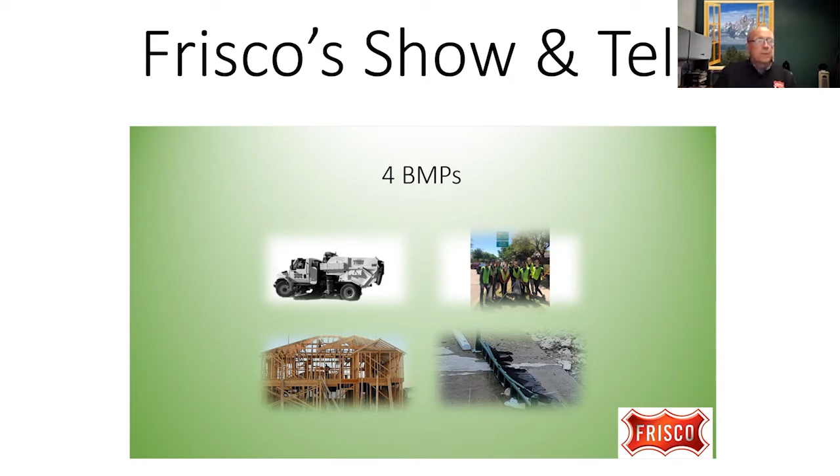I want to thank COG for putting this on and all the events they've provided in the past. I want to talk about 4 BMPs that we have in Frisco. We have a lot of BMPs, obviously, but I just picked 4 of them that I think we're doing something a little bit different, maybe a little nuanced to what others are doing. The idea is that you might benefit from the way we're doing it and make it your best management practice as well. I serve on a team, we do a lot of things I think really well, and I don't mention everyone's - I don't mean to leave anyone out by not mentioning the BMPs they're involved in, but I picked these 4 for the reason I stated, that others might benefit from it as well.

The 4 are: street cleaning, adopt a street, the way we handle single family housing, and our trash rack. Now, first let's talk about our street sweeping.

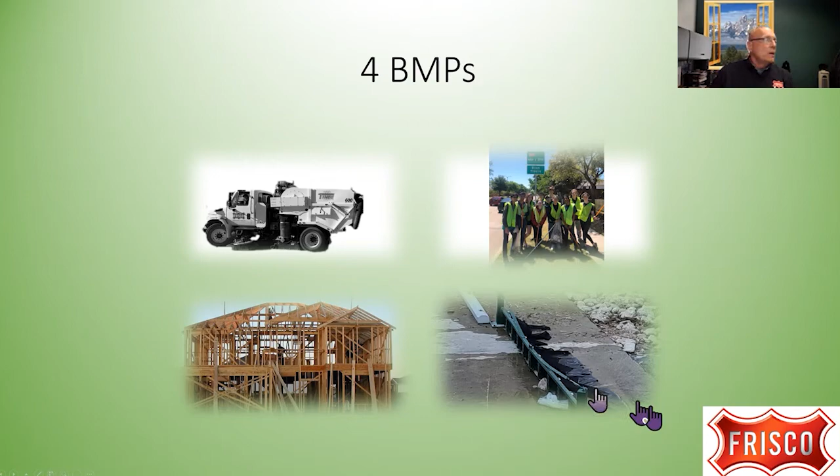Let me shed a little bit of light on our street sweeping program. First of all, if you're not familiar with it, this particular type of street sweeper is a regenerative air sweeper. Does my cursor show up on the screen? Okay, it does show. The regenerative type sweeping, which picks up fines and other things, is a very effective way of sweeping. I'm going to mention that and how we use it in a moment.

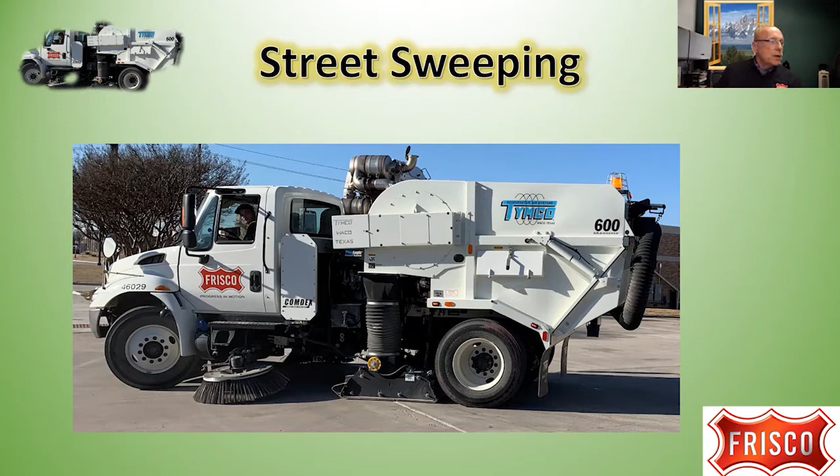We have 3 types of sweeping in Frisco. We have contract sweeping, which is done with the regenerative air, and then we have an in-house sweeping program that has 1 regenerative sweeper and then a broom, which I'll show you a picture of in a minute. On our contract sweeping, I found it's effective if you give them routes and they do them over and over again. We have 2 times a month for our thoroughfares, once a month for collectors. They're very effective at doing that.

Also, sand removal after a winter like what we just had - they're good at that, but they don't do so well jumping around, and that's what we got our in-house sweeping program for. We do that for our city yards. From time to time our yards get in a mess, like every week, because of the activities we do, the digging in mud and so forth. So the yards need to be swept, and we also do residential streets as needed with in-house sweeping and sand removal - we help on that as well.

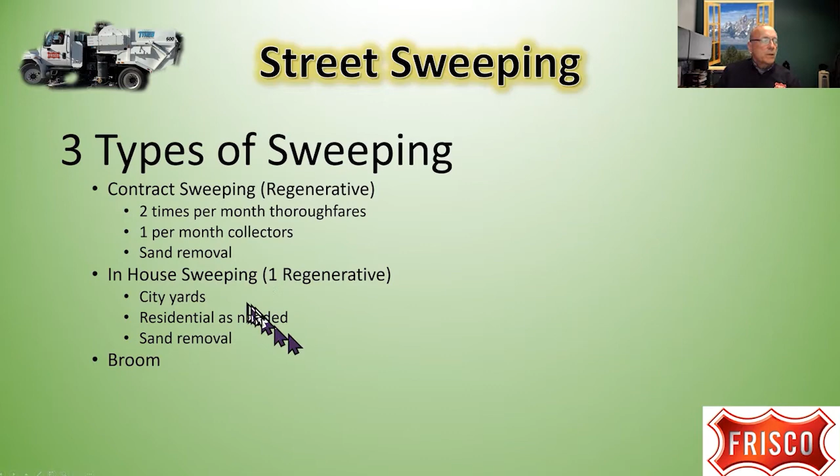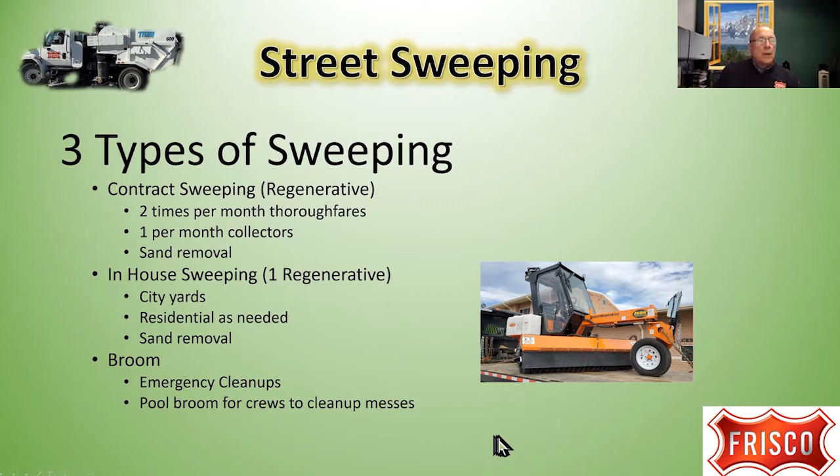So we found that jumping around is good with the in-house sweeper, but we also needed a broom - this is the broom I'm talking about. This is more for emergency cleanups, and stormwater actually purchased this broom as a pool broom for the street department, water department, stormwater, anyone who makes a mess - they can go out and clean up their mess.

And this is relatively new. One reason we got it is the regenerative sweeping takes a couple of days of training to learn how to do. This one you can learn how to operate in 30 minutes. It has an air-conditioned cab, and I resisted getting an air-conditioned cab, but then we realized, what's the best chance of getting the street swept on a hot day? An air-conditioned cab, and also it protects the operator from all the dust generated.

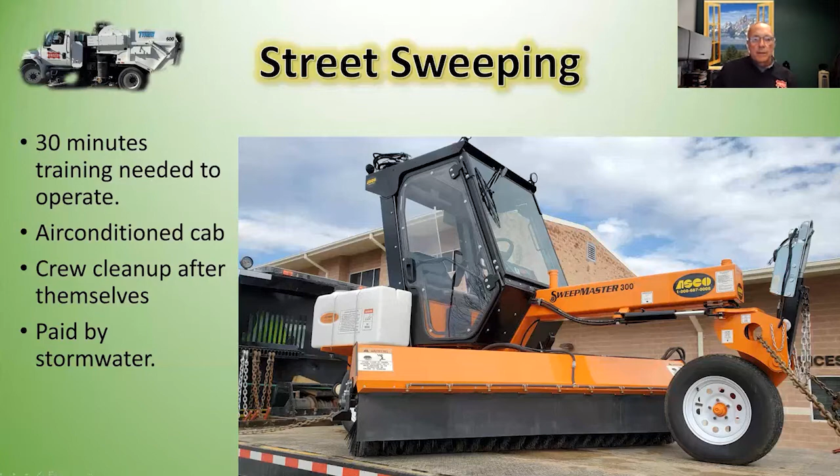And so this gives the crews a way to clean up after themselves, and like I said, it was paid for by the stormwater.

Another key thing with this is waste management has a central location for dumping. So when our contract sweeper comes here, we have a central place in town for them to dump, and we have it all dumped in one pile, whether it's from us or our stormwater crews. And we haul that waste to the landfill where it's weighed. To give you an example of how much we hauled away after the snow event, we hauled away 254 tons.

In 2020, we reported 523 tons picked up for the whole year. So we picked up almost half of our annual weight in just a few weeks after the storm event. And in 2019, we picked up 804 tons.

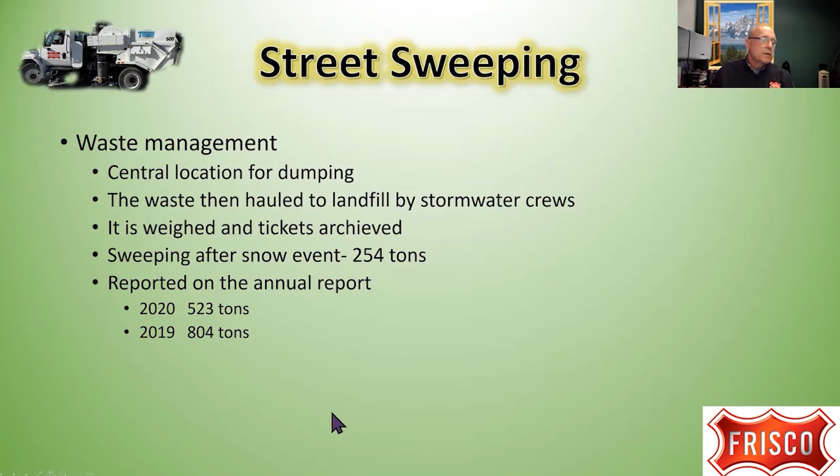Now, I bring this up because this is part of my annual report, and we put on there that we removed 804 tons. And yes, the pollutants are physically removed. The street's part of the MS4. You pick it up off the street, it's physically removed from the MS4.

So lessons learned: important thing is to have a central place for dumping. And I recommend an RFP for your street sweeping. Don't go out with a straight contract bid to get the low bidder. You want an RFP, and if your purchasing department needs help on that, ours is really good at doing that, and we can help out on that.

And the key thing is to record the weight for your annual report. And then have a broom for quick cleanup. And then there's an example of a regenerative air sweeper, and it also cleans out inlets.

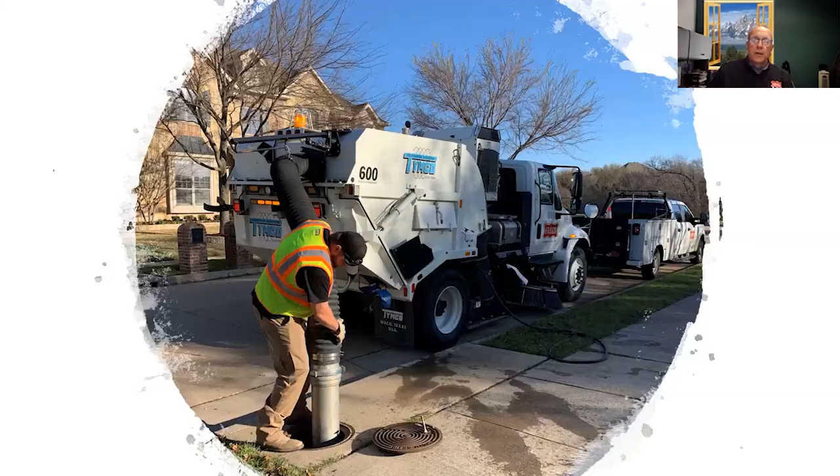Okay, the next program I'm going to talk about real quick is our Adopt a Street. A lot of people have Adopt a Street programs. Now, I didn't pick on them just because they take the best photos, they do, but there's an important thing. Trash, I would say, and I think there's a lot to back this up, is our largest pollutant by volume.

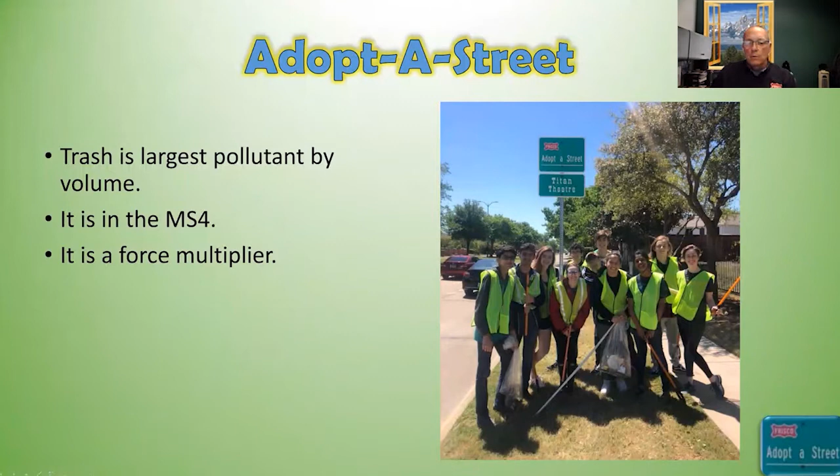And when you pick it up along the edge of the street, I consider it part of the MS4. If it's not in the street yet, it will be soon. The stormwater will blow it in, or the wind will blow it in, or stormwater will take it in. And it's a force multiplier. So this group of people will know the importance of keeping trash off the street, and they'll tell their friends, and it's a way to get the word out.

And this is something else I put on the annual report, and we got help from our people that do the Adopt a Street, so they got a way to calculate the cubic yards collected. And so this is from our annual report: we collected 413 yards of waste that was physically removed from the MS4, from the Adopt a Street program.

There's a couple of things I think they've done well here: the use of CityWorks to create a spatial database where it's done with the GIS, and they do spatial measurements and so forth. We've got a fantastic program, and this lady here, Juliana Marie, runs a really great program, and you can contact her for more information. But this group of people, like I said, they take great pictures. There's no bounds and limits on what can be taken with this program, so it's infinity and beyond with this group.

Okay, the next thing I'm going to talk about is our building program. We might know a little bit about this since we have 1,989 active building permits right now, so we have a little bit of experience in this area. And I'm distinguishing building construction from civil construction. The civil construction is the infrastructure such as mass grading, roads and bridges, water and so forth, and the structures, which is a different type of construction.

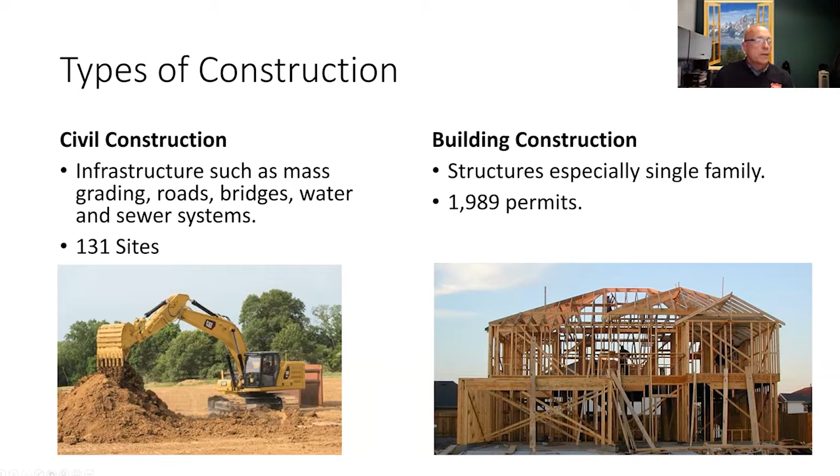If you look at these two pictures here, you can visualize what you would expect to be the maximum pollutant discharging from the site. Obviously, from the civil side, it's erosion sediment that's a problem. In building construction, it's going to be trash and debris that's a big one. Another key difference between these two programs: we have 131 civil sites, and like I said, we've got 1,989 permits right now for building. We have an approach I think is scalable for all types of cities, regardless of size. We were so overwhelmed with this that we had to adopt something, and I think others can benefit from this. It's the same permit, but we treat them differently.

The builders are many times mom and pop operations, and so they don't know, and they really are ignorant sometimes of some of these requirements. So we inform them, get them up to speed, do a lot of education, and a lot of the work's done by subs. So the builder on this site doesn't have as much control over his site as maybe a civil site does.

And you got high turnover. It's a lot of problems. Trash is a big problem. Concrete waste and track out and trash is a big problem from these sites. So with this, it's like herding cats.

So what do we do? We don't go inspect them. It's impossible for us to inspect 1,989 projects efficiently to make sure they're up to speed. But what we do is audit them and make sure that they're inspecting them, make sure they're doing their weeklies, and we go through their process to make sure their process is actually going on. So we don't spend a lot of time inspecting them, we spend a lot of time auditing to make sure that they're inspecting them.

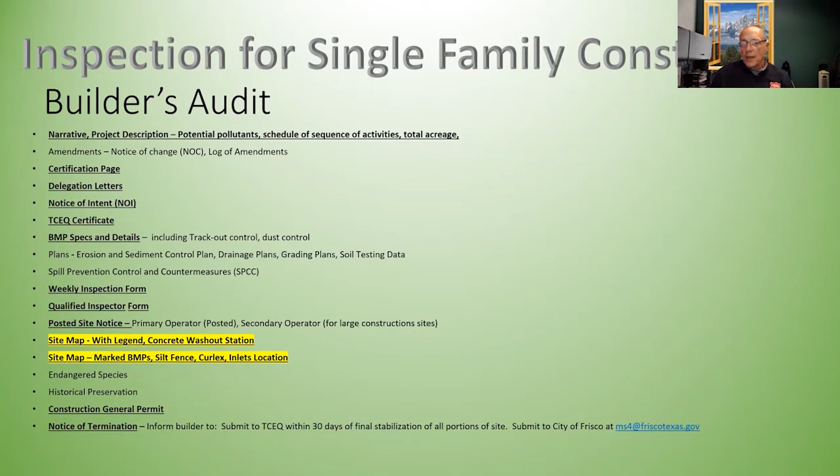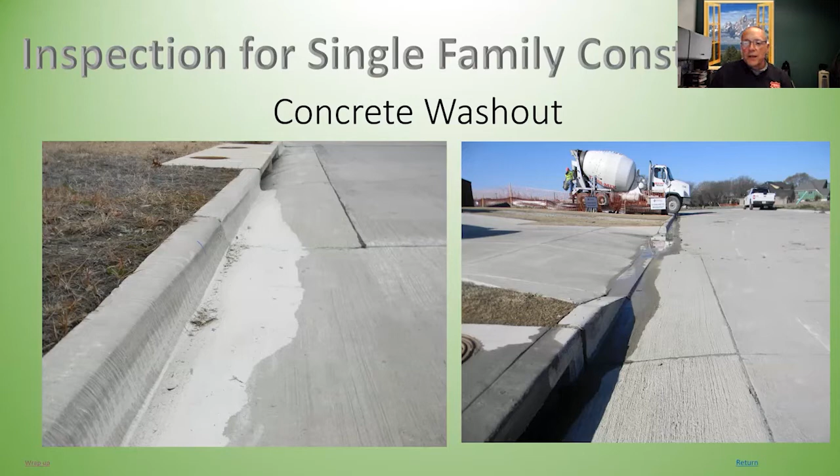And so we don't actually even do a lot of citations. There's one thing that we do a lot of citations on, and that's concrete waste. That's probably our only no exception, no tolerance rule. But other than that, we are trying to help them get up to speed and make sure they're doing their processes. But we will issue a citation for something like this.

So in summary, for the single family, it's different than the civil, and we treat it different. And like I say, zero tolerance on the concrete spills, and we're just trying to tame the West, and the auditing process helps a lot. Chris Collis has got a great program on doing this, and there's his email, and he can share the audit program and what they do on the single family.

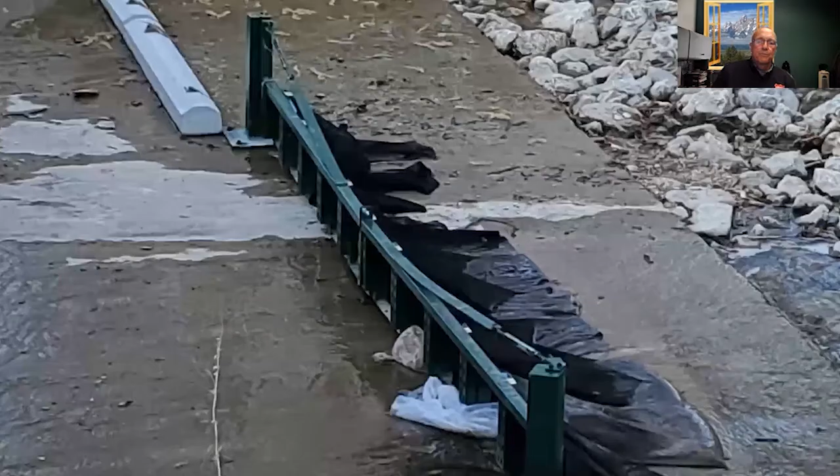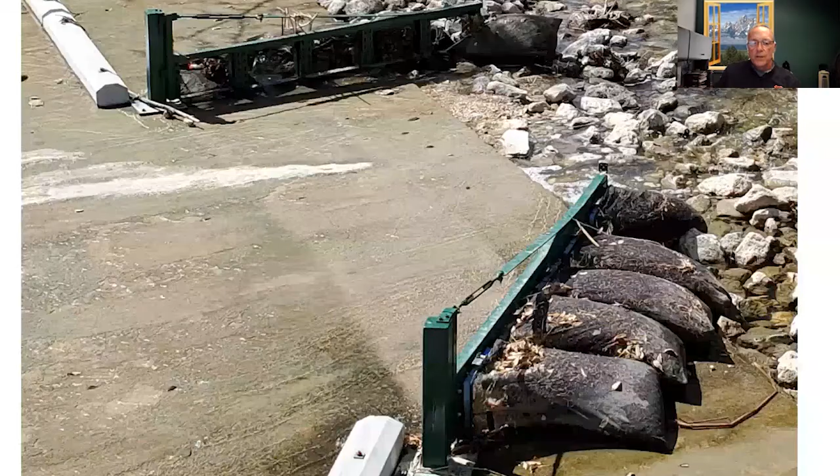The key takeaway from this is a breakaway approach. It breaks in the middle. It's a shear pin in the middle, much like what's on a signpost - the shear pin, the signpost will snap when it's hit and will break open. And the idea is it won't flood. Here's my geniuses at work, and they got this built, and this is what it looks like in place.

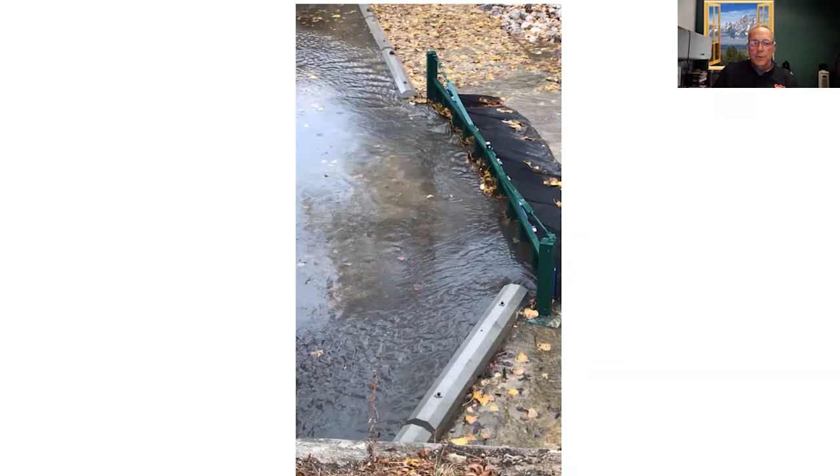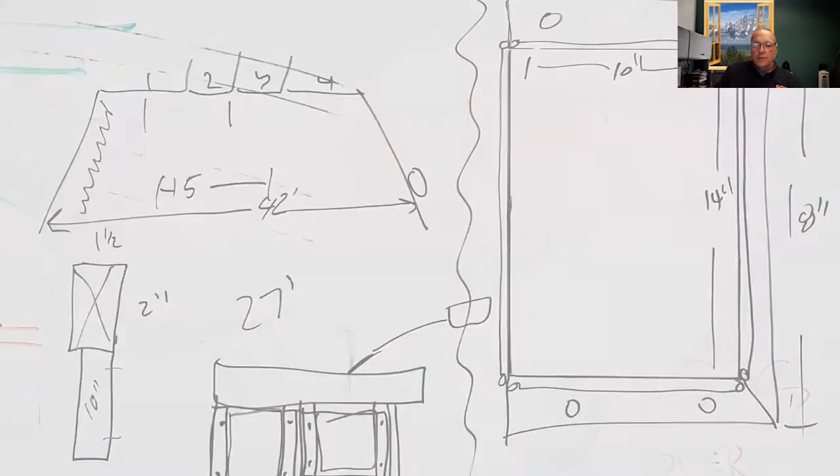So we also had it freeze tested. That's a part of our rigorous testing program, subjected to 0-degree temperatures, and it passed that with flying colors. But this is what my team took - they took this and converted it into this. The Council of Governments was gracious enough to have someone come out and measure and get drawings on this so it could be used by others.

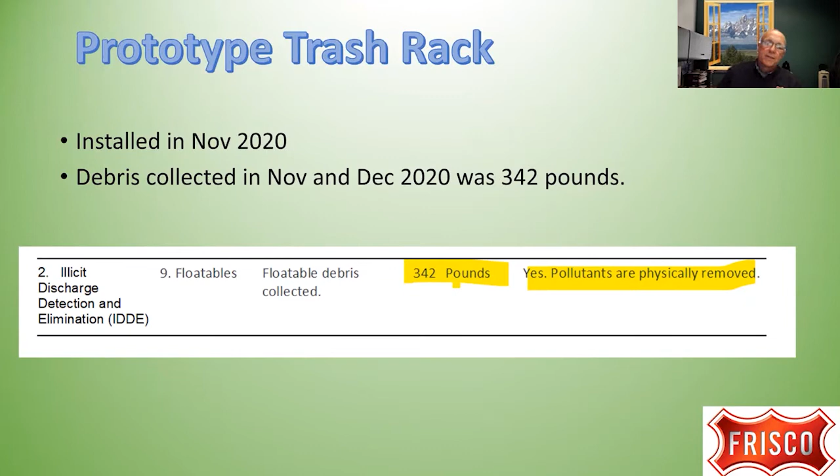So it was installed in November of 2020. In my annual report, we collected 342 pounds at that time, and that goes on my annual report. Since then, we've collected a ton, and I suppose a key feature of this is a ball bearing hinge so that it can support the weight of this.

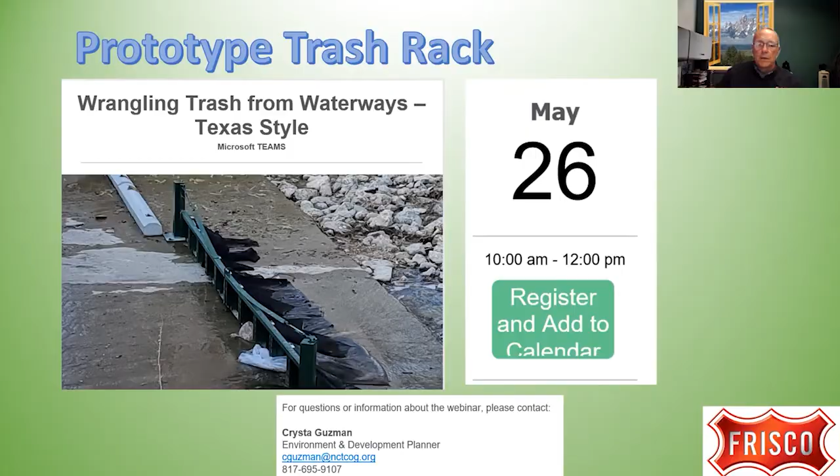Anyway, there's going to be a lot more information on this at the event that's coming up on May 26th, and I'm sure Crysta will have more to say on this. But this wraps up all I got to say, and I'm ready to turn it back over to Elena, and I will be watching the chat. So if you got questions, you can put your questions in the chat, and I'll turn it over to Kristen.

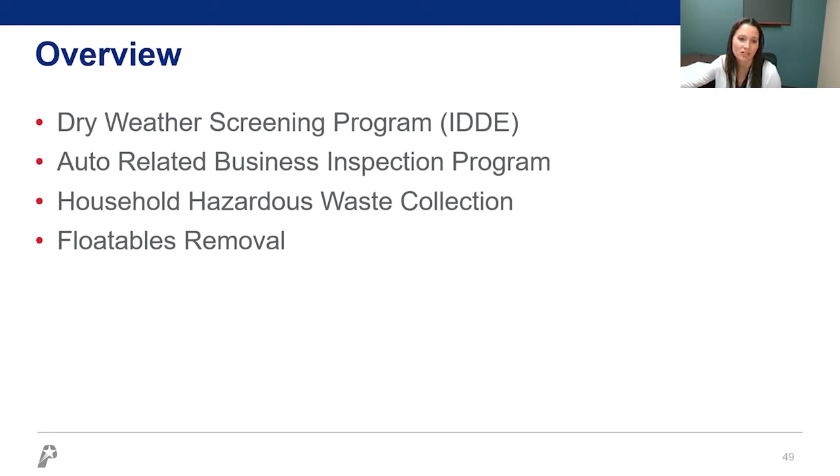So yes, go ahead and next slide. Today I'll be discussing our dry weather screening program, our illicit discharge detection and elimination program. I know all of our phase 1s are required to do this, and level 4 phase 2s are required. But it's a really good thing to showcase for anyone who does not currently implement this program, because it's a really great BMP. I'm also going to discuss our auto-related businesses inspection program, our HHW collection, and floatables removal.

Just to start, I chose this one because it is my absolute favorite BMP that we implement. The reason being is because it's the boots on the ground. You really see the results of your efforts. You find so many different types of illicit discharges that you would not have found otherwise.

For those of you not completely familiar with the dry weather screening program, basically you go out and inspect all of your outfalls that are feeding into your waterways. If you see flow, you trace that flow back to the source. You make whoever the source is stop, and then you remediate whatever is in the water. So it's a really great program.

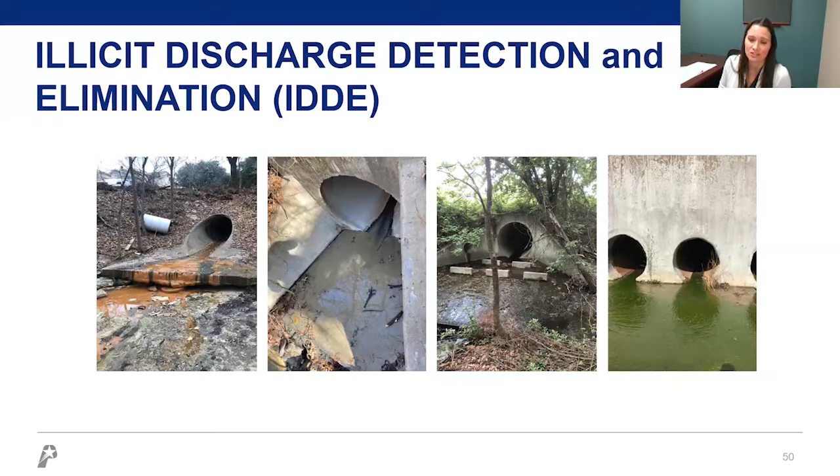You'll have all kinds of illicit discharges that you'll find: construction sedimentation, like the picture second from the left, and sanitary sewer overflows. We see a lot of building materials and pool plaster, as a lot of pool plaster companies are always washing their plaster down the storm drain inlet. The good thing is you'll be able to catch them, and while they're transient and move from site to site, you can at least give them a notice of violation letting them know that if they do this again in our city they'll get a citation, or you just start off giving them a citation depending on how egregious it is.

In the city of Plano, we have 3,000 major outfalls that we inspect, not each year but every permit term, so we inspect 20% of these every year. We have 4 specialists that inspect those, so that's 150 outfalls each inspecting per year. This is in addition to the other programs they oversee, so it's something they just have to fit into their schedule.

It's done during dry weather time, for a couple of reasons. One, you don't want to go out and sample for something when all the pollutants have already been washed away. But you also don't want to sample when it's raining, because you'll have flow in almost all of your outfalls and waste a lot of time.

We were having some issues in Plano with our high water table, so we were getting a lot of groundwater coming out of our outfalls. We found that if you test for trihalomethanes, it shows whether whatever you're sampling was once chlorinated or disinfected. So anything from sanitary sewer overflows to a drinking water line, you'll be able to tell if that groundwater is actually not groundwater. The first couple of years we wasted a lot of time testing groundwater, but now that we know where those groundwater sites are, we no longer sample at those locations when we see just regular water coming out.

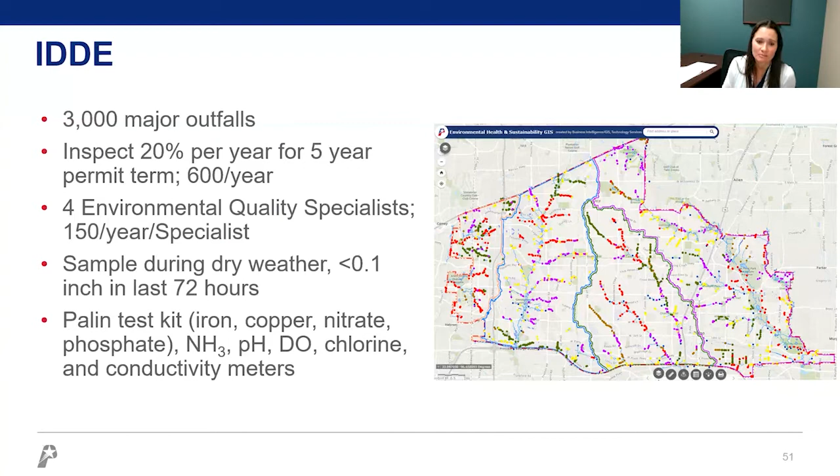Many of us are already required to do this, but if you're not, you don't have to go out and all of a sudden start inspecting all 3,000 of your outfalls. But if you have problem areas, maybe industrial areas, just find out where those outfalls or areas feeding the outfalls are, and maybe inspect those once a year or once every couple of years.

Our auto-related business inspection program is one I love, because we have about 3,000 facilities in Plano considered auto-related businesses, and we inspect every single one once a year. These are businesses doing anything from mechanical work to auto body repair. On site, we inspect for chemical spills, proper storage and disposal of chemicals, tires and equipment. We also look for standing water issues, which can be vector or mosquito issues, and we inspect their grit traps.

We try to get to those once every couple of years to actually inspect the FOG in it. We also make sure that if they have a floor drain, they have a grit trap. We don't have an ordinance for auto-related businesses, so instead we use our stormwater ordinance and our liquid waste management ordinance to help with enforcement at these facilities. This is working for us so far, but if you're looking for a stellar ordinance for auto-related businesses, you can look to the City of Grand Prairie. They have an awesome ordinance, and their team has been doing this for quite some time. As I understand it, the City of Arlington has modeled their ordinance after that one as well.

Jumping to HHW, we do it a little differently in Plano. We don't have citizens drop it off with us; instead, we go to them. They're given a chance to put their waste on the curb once a week, and we do it by zip code, 24 hours prior to an event at their house. They just give us a call or submit a request online to have us come pick up their HHW. We don't have any drop-off service available, but we allow them to put up to 15 gallons of HHW on the curb, and we do not collect commercial waste.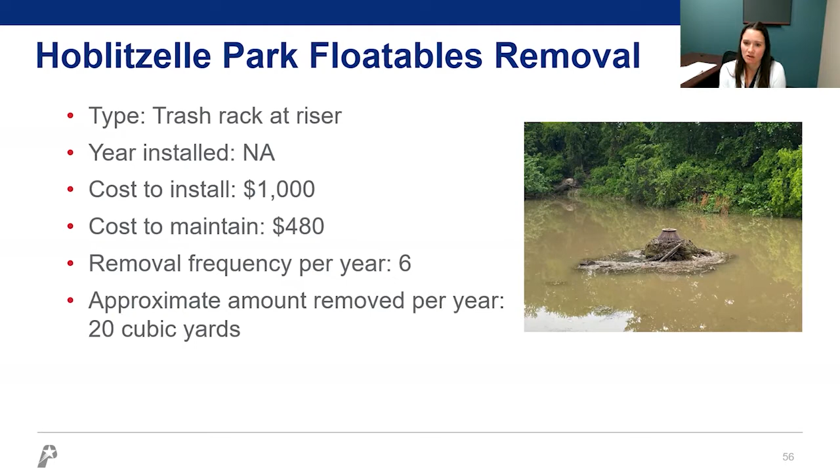Now jumping into floatables removal, we have a number of locations throughout Plano where we're collecting floatables. We've taken a lot of sites that already had a riser or spillway and installed devices at those locations. This is an example of a trash rack installed next to or on a riser. The cost to install it was $1,000, and the cost to maintain it is $480 a year. We just hop in a John boat and tool around the riser about 6 times a year, collecting about 20 cubic yards of debris and floatables a year on average.

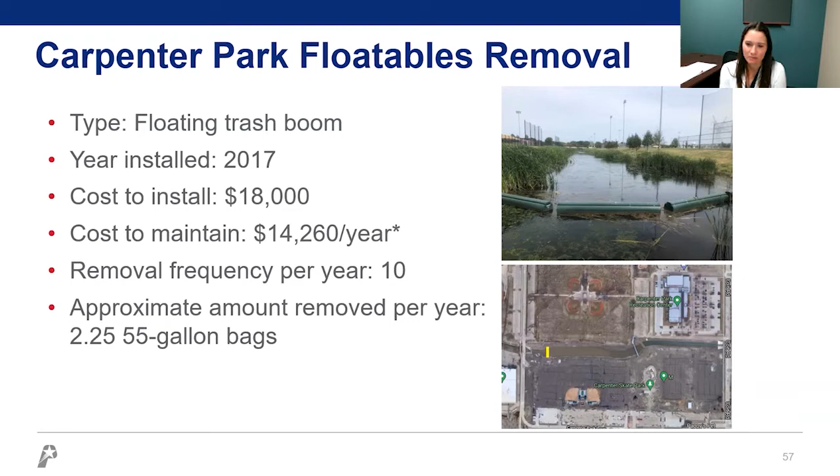This is located within one of the parks where we saw a lot of trash getting into that particular waterway. As you can see in the picture on the bottom right, that's the park, and the yellow line is where that boom is located.

The sticker shock of $18,000 was mainly because I was thinking that when you put a boom like that, you just tie it to both sides of the stream and call it done. But there's actually a lot more that goes into it. If you're considering something like this, here's what you'd need: each side of the boom has a concrete footing that goes into the ground, and you also have to install a maintenance shelf at the bottom and a safety shelf on each side. The safety shelf is so that if someone falls in, they can get out.

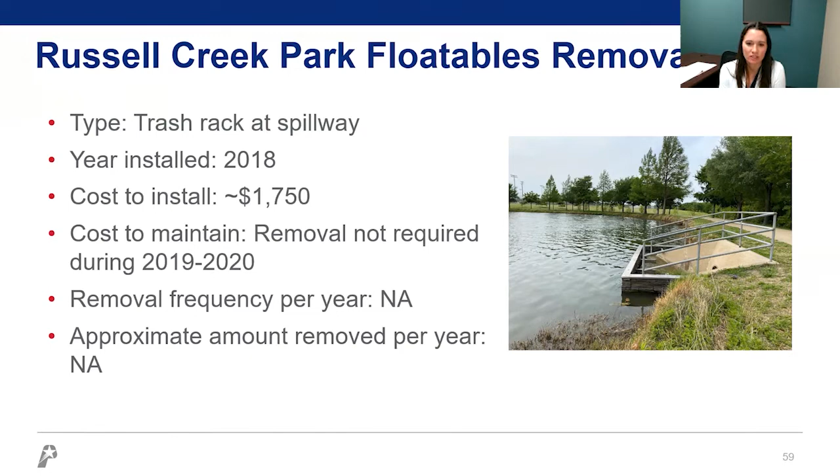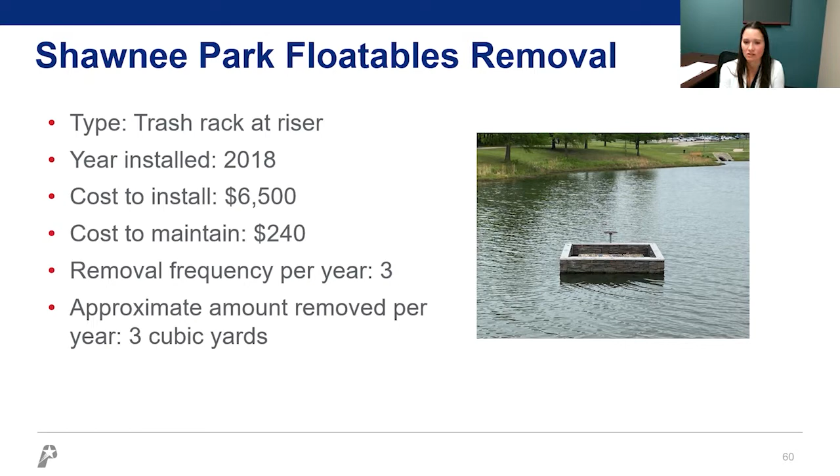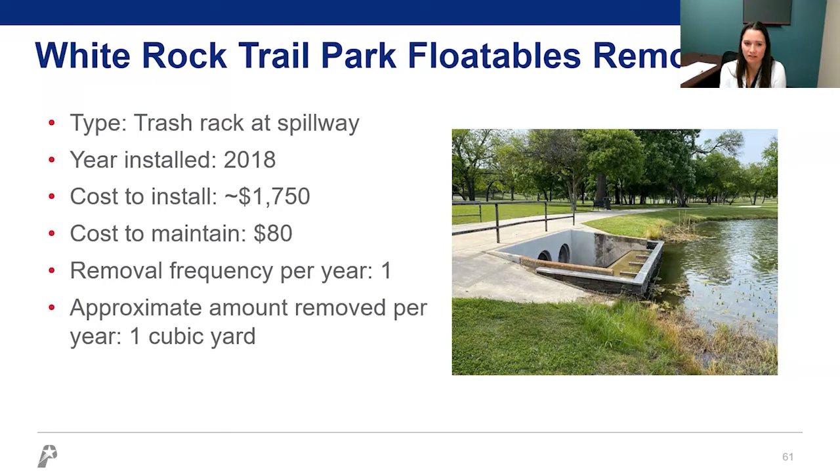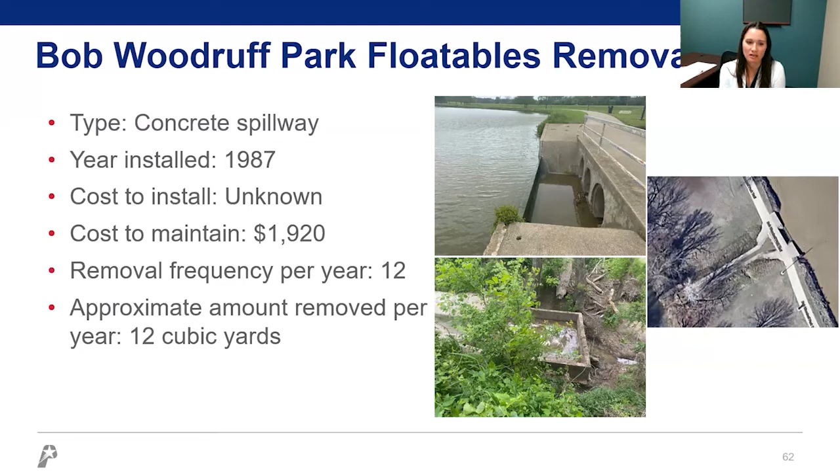Finally, I wanted to include this example of something already existing — the whole 'don't recreate the wheel' idea. We didn't put a trash rack around this spillway, but trash still collects at the entrance on top and at the exit on the bottom. Here's a bird's eye view of what that looks like. Because trash collects at the entrance, and when it overflows it goes to the exit, no trash rack is needed. We know where the trash is, so we just go collect it about 12 times a year, and we've collected about 12 cubic yards on average per year.

I think that's it for me. Thank you.

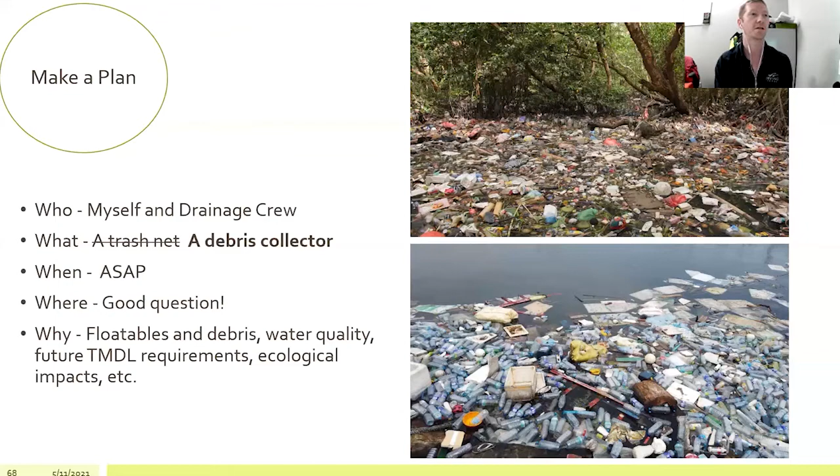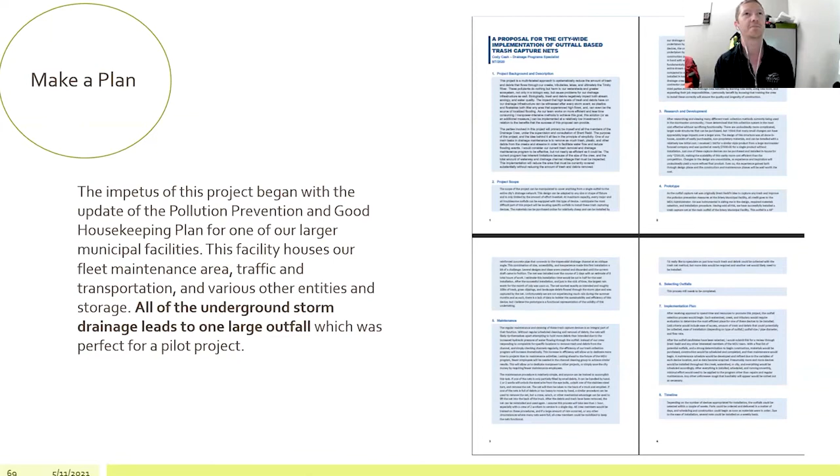For the make a plan section, we have a pollution prevention good housekeeping plan for one of our larger municipal facilities. One of the things we wanted to do was get a pilot project for the debris collector, and just try something new to see if it would be effective. So making a plan meant writing this document up. It's pretty boring to read, so I won't bore you with the details.

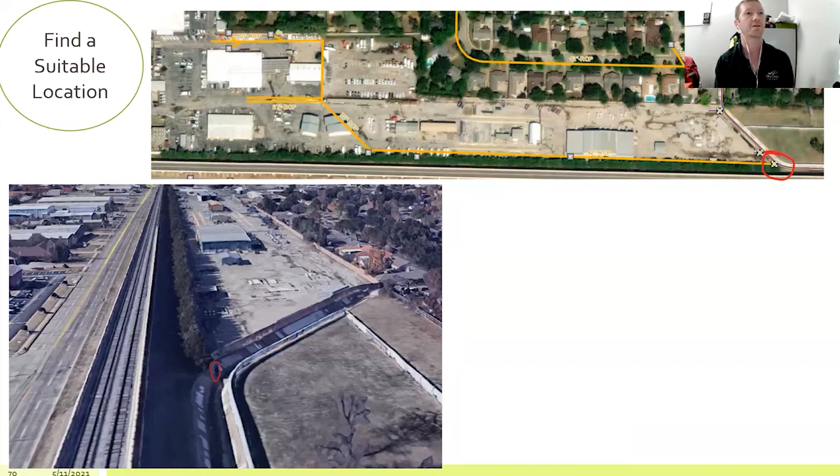Moving on to the cost projection, this is the fun part. Initially we looked at getting a proprietary system from a contractor, Stormwater Systems, also known as Stormex. They make a really good-looking product, but their price tag was out of my range to what I could conceivably get approved. It was almost $7,000, not including maintenance. I thought the nets were kind of small too, only 5-foot long nets. Seeing that was disheartening, made me think we weren't going to be able to get this project going.

So I decided to see if I could put something together halfway decent and maybe get approval to install it. I made a long list of things we needed to make this happen. The total ended up being just over $1,100 for everything, but our main expense was a hammer drill to install all the fasteners in the concrete. Without that, it was only around $500, still pretty reasonable, much more reasonable than we were initially quoted.

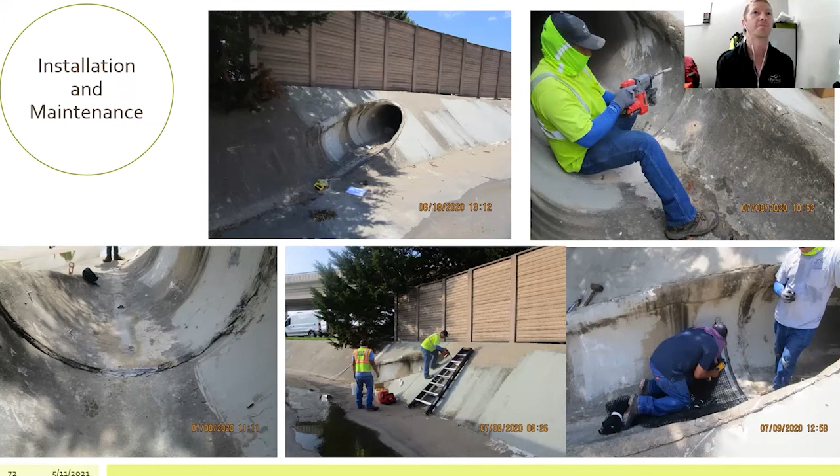Here are some photos of the install. The next slide shows maintenance photos, but mainly we're drilling into the existing outfall, attaching fasteners, epoxying them together. Our initial first debris collector was roped up, and it looked really shoddy. Unfortunately, between the day we installed it and the first time it rained, someone came out and took off our carabiners and our rope, though fortunately they left the net. That allowed us to make some improvements, so it was kind of a blessing in disguise. We ended up using cheap master locks and metal wire, and that has not been stolen yet, so pretty happy about that.

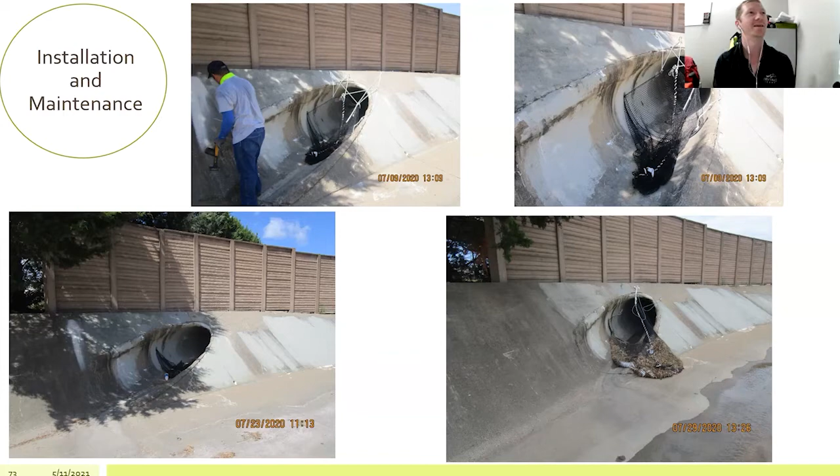Here are photos of the debris collector during a rain event at the top. It backs up the flow a little once it gets full, but not enough to cause serious worry for this installation, since it was all under a city facility so flooding wasn't really a risk here. The bottom photos show after the rain event, the full debris collector with all the trash bags loaded up, and then what it looks like after it's been cleaned.

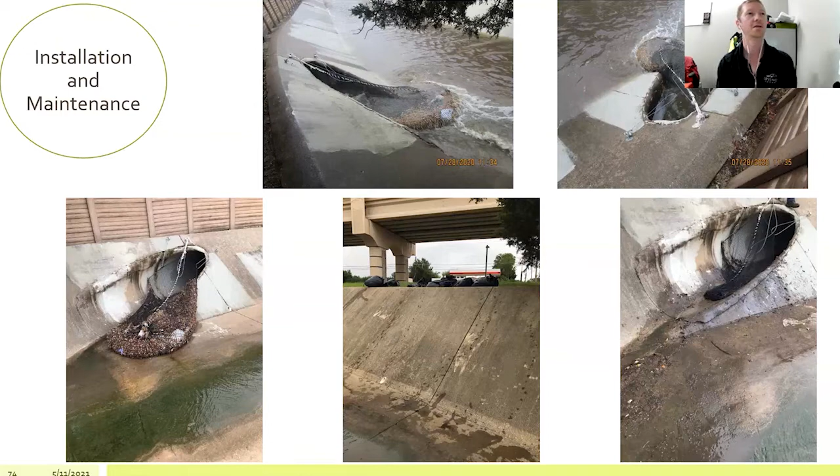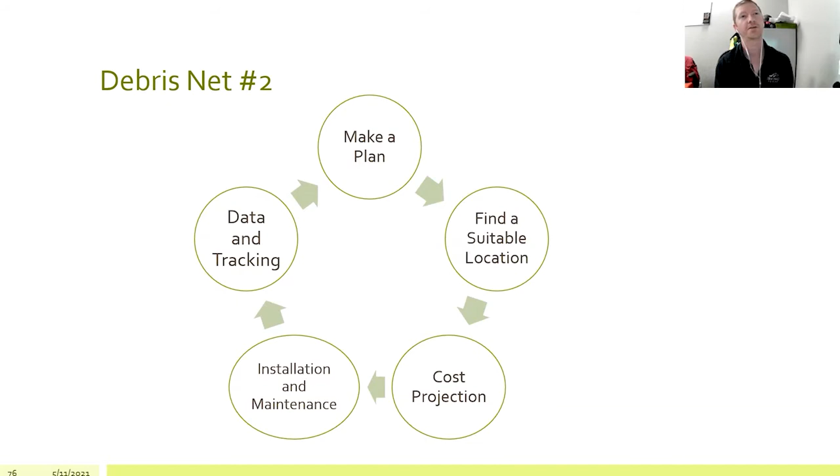Our second net is a little more effective at collection, but we'll talk about that on the next slide. We're going to follow the same plan: make a plan, find a location, cost projection, install and maintenance, and data and tracking. For our second debris collector, it looks like we're going to do two birds with one stone — we're going to make a plan and find a suitable location at the same time.

Every time you drive down there, you can see it's just floatables everywhere, trash. So we were wanting to do something to help out, and this ended up being more of a challenge since we didn't have immediate access like we did at our municipal facility. We had to do a little more work, install a gate, among other things. Fortunately, our resident there was super eager and helpful, very accommodating for us to try this out.

Here's the same spreadsheet of materials that were required. You'll see this one is much cheaper than the first installation due to our netting, which we were able to get as a promotional prototype item. The total for this one ended up being just under $400. The main expense was the 12-foot fence gate we had to install for access for cleaning this thing out.

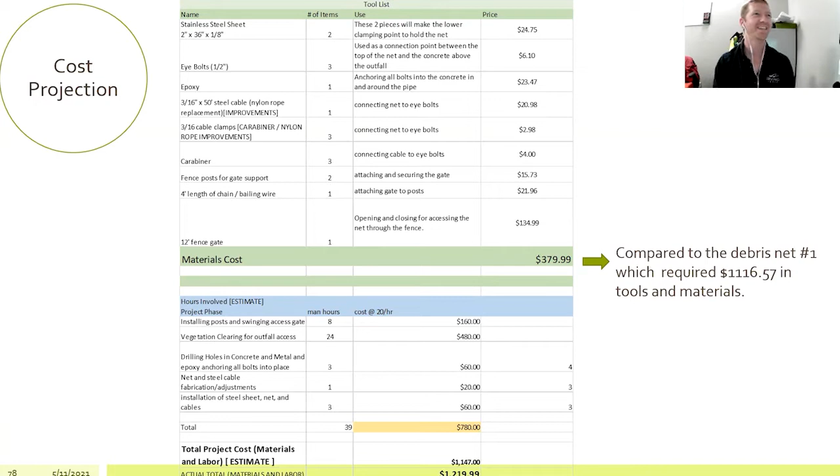This is what the outfall looked like before we got started. It's a 48-inch outfall, just like the one at our first location, but this is more of a head wall and a little easier to work on than the weird angled outfall. We would definitely have to remove some vegetation and clean up the area before we could get started with our installation.

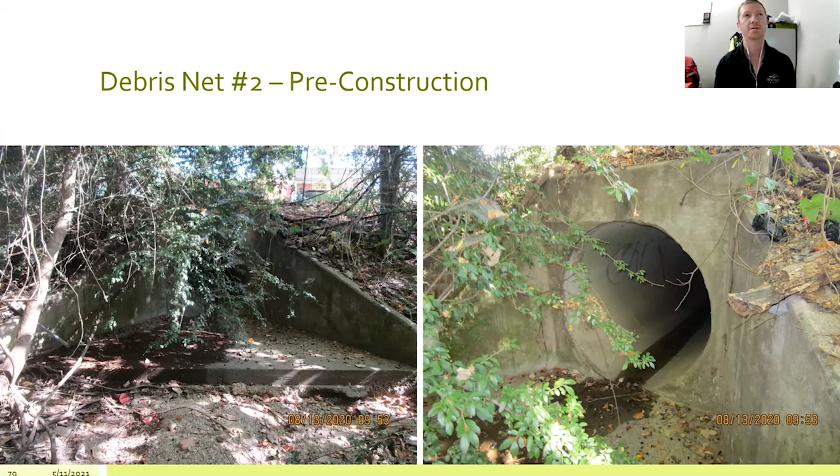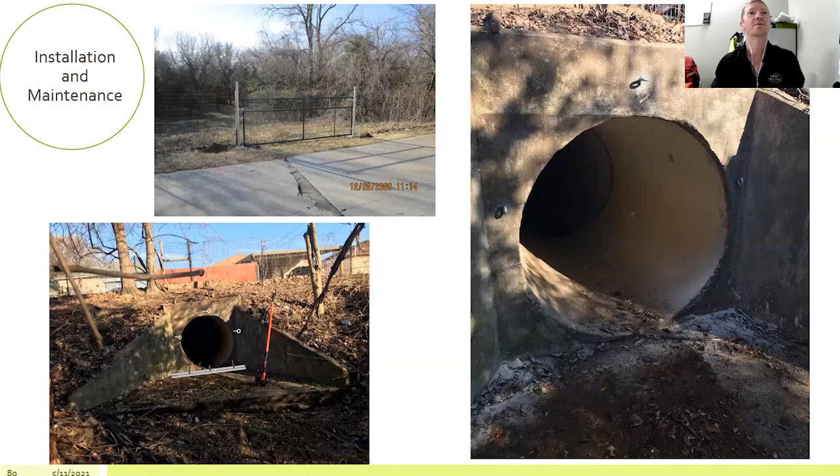The bottom left photo shows a high-level rendition of what we were wanting to achieve for fasteners, and the photo on the right shows the eye bolts installed. The next slide will show a few more installation photos. So the eye bolts are in, the threaded rods are in the bottom, and on the right we have the finished product.

This one specifically is not as full of a capture system as our initial project, mainly because this one would be a little more challenging to repair if we had a backup, as it runs between a couple houses, and I also didn't know how much water was going to be flowing through here. So I wanted to play it safe initially and make it so we could go back and change it if we weren't getting the desired result.

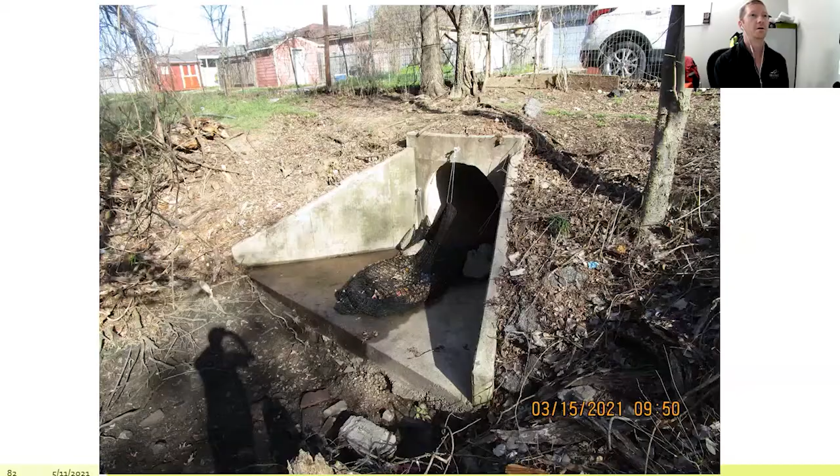Here's the debris collector after a light rain. This one tends to collect mostly leaves, and you'll see we piled up some concrete on the sides due to low flows bypassing the net. Our homeowner down there gave me information that a lot of floatables were still getting by during low flows, so we were trying to remedy that with this quick solution. Didn't really work, actually it all got washed away during the next big rain. So that didn't work out, but we always just try to adapt.

This one's actually a video, I don't know if it'll play, but this is kind of what the debris collector looks like. During a rain, you can see that not just during low flows, we have a lot of bypass around the sides. This collector tends to fill up with a lot of debris more so than trash, so I'm almost even hesitant to move it closer just for the safety aspect.

But it does work well, it does capture a lot. Sometimes we have a lot of trash in there, usually it's just more leaves and debris. But either way, it's keeping it out of that person's pond and probably improving the water quality anyway.

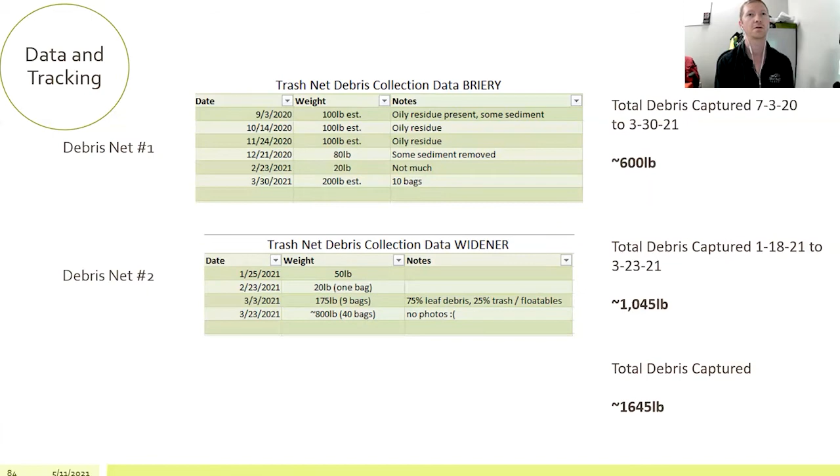Our total's been almost 1,700 pounds. It's probably more than that now. I don't think this is the most updated list. I think we've cleaned it since during this month. So anyway, pretty good comparison.

So why do I think these debris nets are great? One, they're really cheap, had a dig there at Stormwater Solutions, sorry if any of you guys are watching, but it was very expensive otherwise. The ease of customization - these are pretty modular. You can remove them, move them, and install at a new outfall with relatively low expense, probably under $30 in epoxy and fasteners. This can be scaled depending on how big your net is, whatever outfall you want to target.

If you do have specific outfalls you want to target, if you just notice, hey, we're getting a lot of floatables in this area, you can trace it back - almost like an IDDE trace. You can go back and find a source and say, well, looks like most of this area is draining through this one large outfall. You can put a net up and see how it does for a few months, and if it's not performing well, you can just move it for really cheap.

Everything's easy to mount. You just drill holes and epoxy everything in, or put a wire rope through and a couple master locks. But they simply work because we're able to get data, and also for future permit regulations - like I mentioned earlier, some places are going through TMDLs with floatables. I know in the Northeast they're having that issue. Certain areas, like LA, also have full trash capture on all of their stormwater stuff. So yeah, it works, and it's pretty cheap, and you can move it.

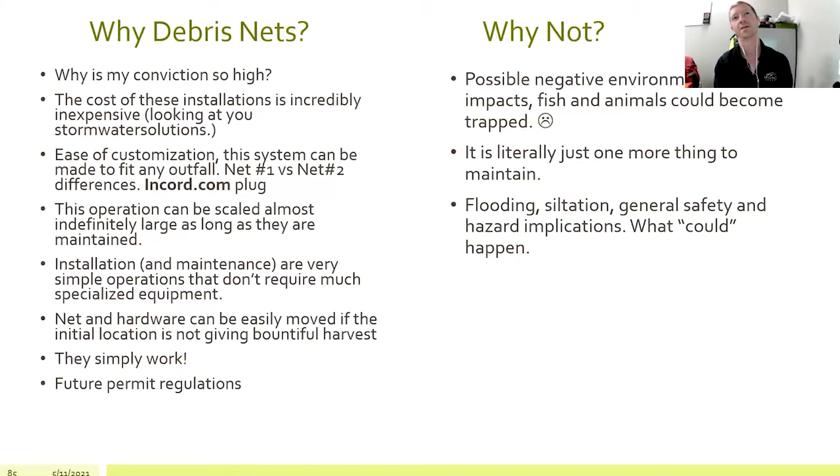So what are we going to do moving forward? We're going to put 2 new debris collectors in this year. I'm looking for suitable locations right now. We're thinking about changing our debris net number 2 with that low flow floatable bypass, which I was talking about. We're working on a less labor-intensive method for net cleaning - I really want to get one of those trucks with the big crane on the back, but they're kind of expensive. And just more data collection.

So more data is always better, in my opinion, and yeah, it really helps sell the narrative. So I think that one's it.

Feel free to contact me if you want any information or just want to pick my brain for putting trash collectors in. It's kind of like a passion project for me, and I really enjoyed just being able to do our part to clean up the waterways. Thanks, that's all I got.

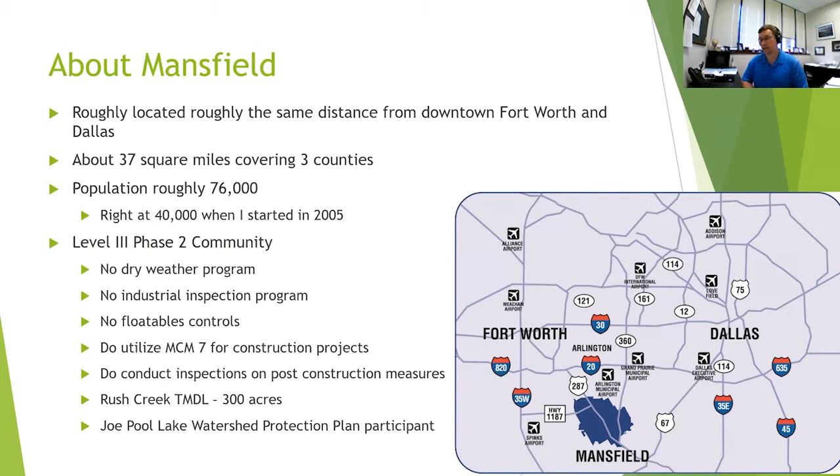So the first thing I'm going to talk about today is our household hazardous waste program. We've had this program before I got here; it started in 2002 through our Parks Department and Keep Mansfield Beautiful. Initially, that first year, they only had a mobile event, and we had 52 households participate.

After that, it started as a voucher program, so residents would have to come to City Hall, get a voucher, and then wait for one of the mobile events or take it to the City of Fort Worth's Environmental Collection Center. In 2007, we started to utilize the drainage utility fee funds to pay for participation with the City of Fort Worth instead of parks funds, and as part of that, we eliminated the vouchers. That's one of the reasons why you see an increase there in 2007.

In 2008, I took over as the liaison for Keep Mansfield Beautiful, and we added another mobile collection event. Then in 2010, we started to partner with the City of Arlington, and we trained some of our firefighters and would conduct one of our own collections if we could get that scheduled.

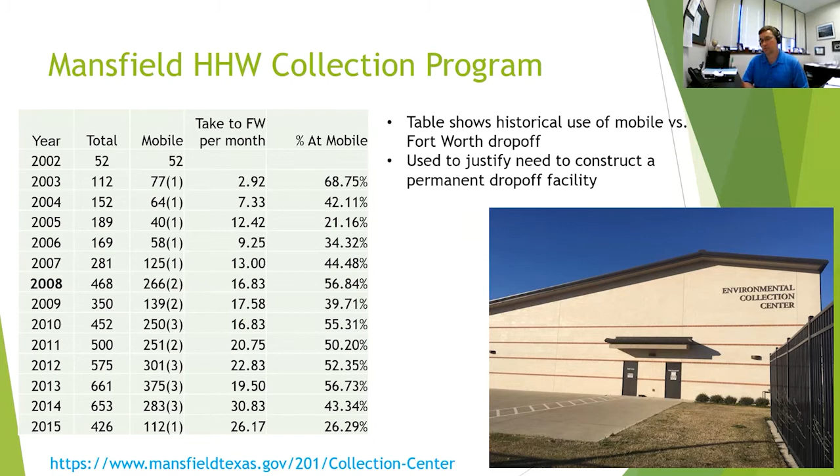The one thing I would note is when you look at the percentage of participation at the mobile collection events, it's always been pretty significantly high. That was one of the reasons why we made the push to go ahead and get a permanent collection facility here. Over half of the participants were coming to one of our events.

If you've had to put those things together — my lights just went off — then there's a lot of planning and advertising that goes into it. You're trying to advertise and get as many people to participate in an event that has a limited amount of space and participation, so we were routinely and regularly having to turn people away after they'd waited in a line for over an hour or so, and they got really upset.

So we created — we were building our service center — and I was able to utilize that table on the previous slide to kind of justify the construction of a permanent collection facility. Note that all of my years are fiscal years because that's how we track everything. We started November 2015 with just the second Saturday of every month, 10 to 3.

In 2018, we added the Thursday and Friday before that second Saturday, from 3 to 7, for those folks who for whatever reason can't get away during the weekend, and also to provide an opportunity during the week but also after hours. We've only ever had one full-time household hazardous waste coordinator. Our helpers that help him unload, as well as bulk, are often from other departments.

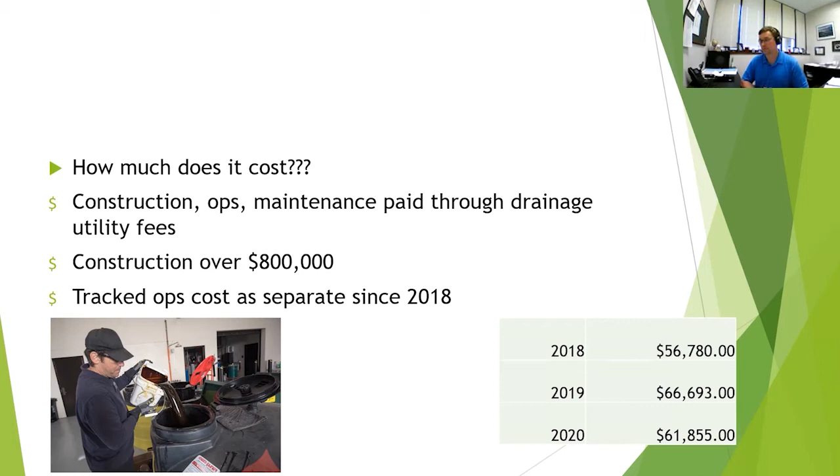One of the things I'd point out is, like Perry, we were noticing some inefficiencies with our street sweeping contracts. The odd thing is, even before I got here and before Mansfield entered into the MS4 program, we were actually sweeping our streets.

Our streets department personnel would rent a sweeper, and they would periodically - pretty much based on nuisance complaints or something like that - come through and do some street sweeping. There wasn't any real rhyme or reason to it, and there wasn't any real data collection to it.

In 2009, we started contracting that out. It's been very inconsistent - some part of that has been my fault, some part has been our contractor's fault. There were several years where we would have an idea how many miles were swept, but we didn't have any of the data that was collected. I don't think the way our program has been set up has been the most efficient.

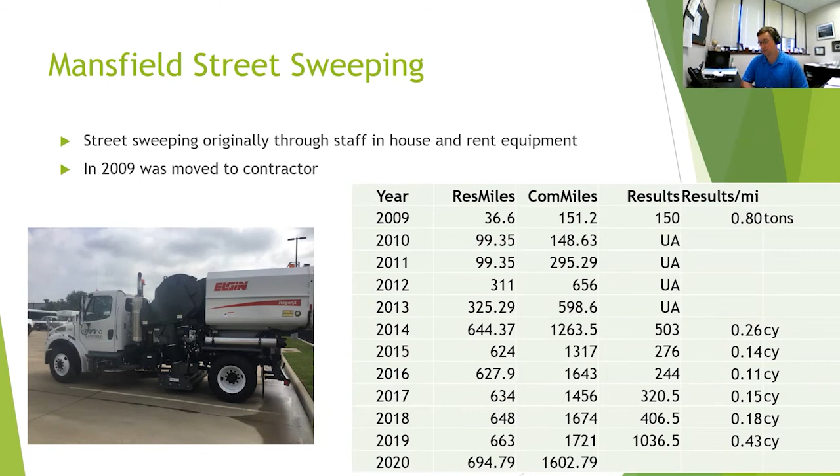Next slide. So beginning this year, we went ahead and were able to purchase our own street sweeper - and there it is. So street sweepers are not cheap - $240,000.

But when you consider the price of the street sweeper, a pickup, a tractor, a zero-turn mower, and all the other ancillary materials, and you spread those costs out over 5 years, and you look at what we were paying our street sweeping contractor and our mowing contractor to take care of some of our drainage areas, it was essentially the same cost.

So we have now purchased a street sweeper. We've hired a 2-person crew that's going to take over mowing of our drainage areas, also helping with our household hazardous waste consolidation and doing some of our minor drainage maintenance.

Unfortunately, I don't have any stats to share on our street sweeping program yet, because we didn't get the sweeper until last month, and we haven't been able to start making use of it yet. But I do expect to be able to address areas a little bit more efficiently, and to get those material weights and volumes per mile improved.

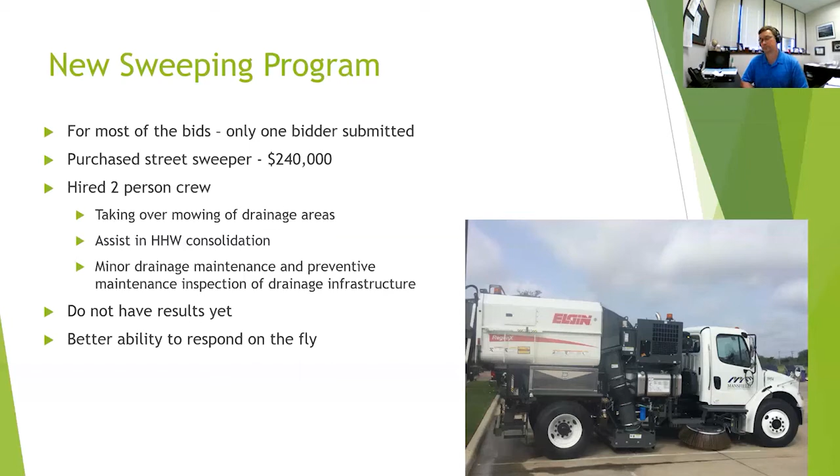So these are just some of the challenges and other considerations with going with an in-house street sweeping program. One of the things I've noticed from talking to different people throughout my years in the stormwater field - I think I'm in a unique place where I also oversee our drainage maintenance. One thing I've noticed through the years is that we have a huge challenge managing resident expectations versus what the city's expectations are for the level of maintenance.

In that open water, mosquitoes were breeding. So we actually ended up addressing a drainage maintenance project or issue because of a mosquito problem. And I also oversee our city's mosquito program, so that's how all of that gets tied in together.

Historically, our drainage maintenance has been completed by a mix of staff from our streets department as well as contractors, and we haven't had a preventative maintenance or inspection program. So we're hoping to address that with our 2-person crew.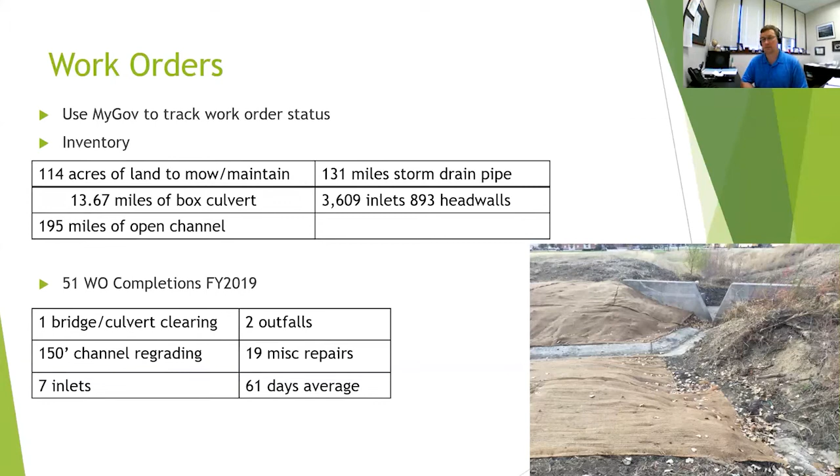This is just some of the statistics over what kinds of materials we have, and then what kinds of work orders we've been able to complete. 2019 was the last one that we have that I had a report ready to go for.

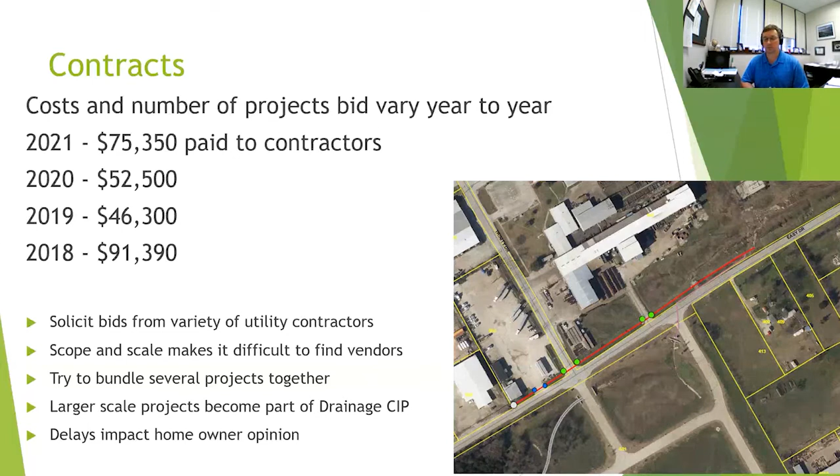So we do contract out some of our drainage maintenance. This is a sketch that I would put together to send out to different utility contractors when I was soliciting bids. We do a little write-up for scope and scale. We try to package 3-4 of these things together, because generally this particular one was $49,000, but generally they're not all that much money. So trying to find contractors that are willing to continue to bid, even if they're not going to get the project, and to continue to bid on very small projects has been difficult.

And so the final thing that I have to talk about is our post-construction water quality requirements. So we adopted those in 2015. They're included in our drainage criteria manual that was adopted by our Planning and Zoning Commission, not by our council. It is based on the iSWM water quality volumes. Typically residential measures are ponds with a multi-stage outfall.

We have had several subdivisions recently that have proposed inlet screens. We really don't like inlet screens in a residential setting, just due to the difficulty keeping track of them, how difficult they are to maintain, and the fact that all you're doing with the inlet screens is collecting the floatables. You're not doing anything to address potential fertilizer runoff and all that kind of stuff. On the commercial industrial side, we're seeing mostly separators.

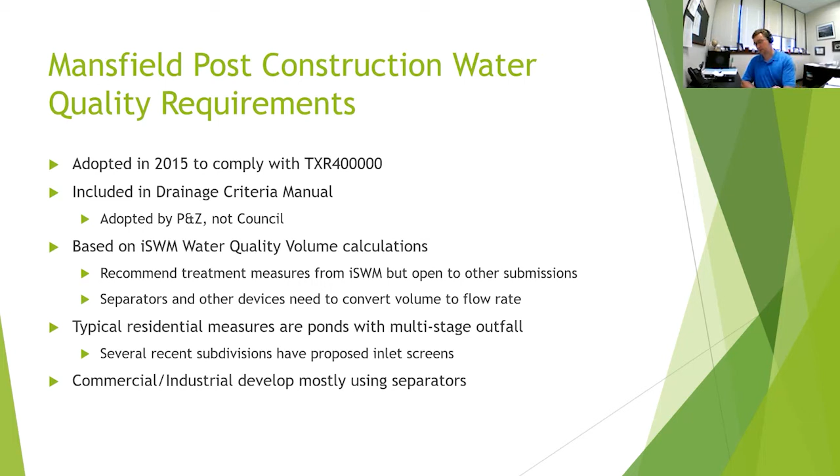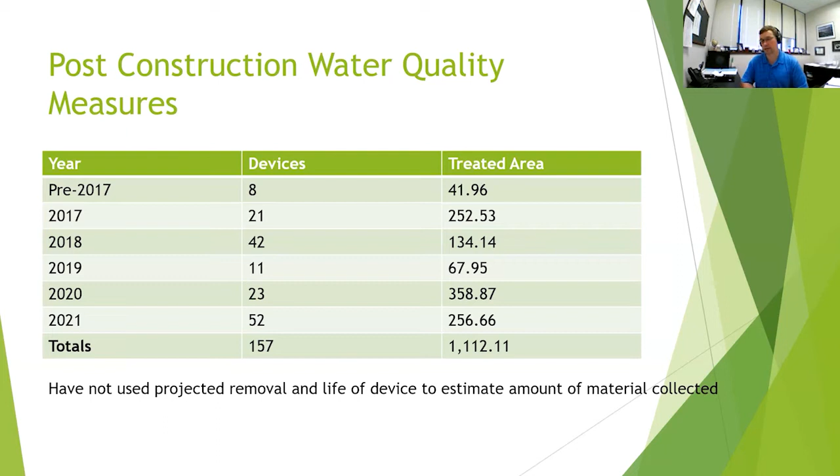And 1,112.11 acres treated. There are ways to estimate how much material's been collected based on efficiencies for the devices or the measures that were selected and installed, but we haven't utilized any of that to figure out how much we potentially collected so far.

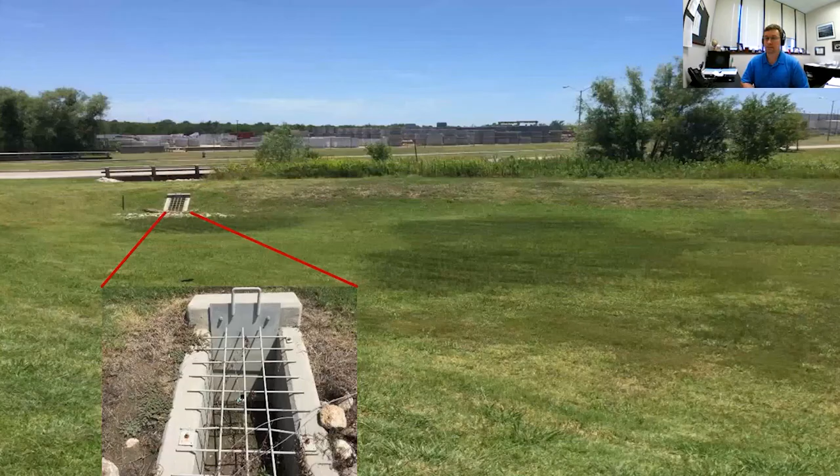Next slide. This is another water quality only pond. You can see the restrictor plate there that was tapped down to the outfall with a very small opening, so the water will fill the pond and then be released slowly over time.

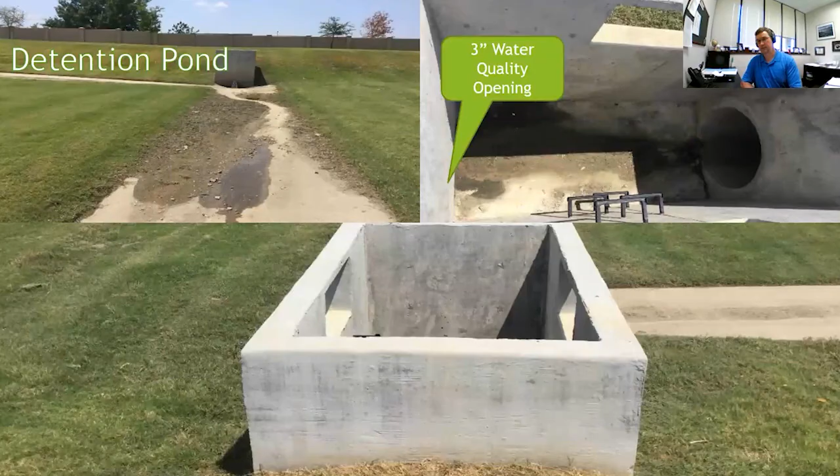And this one is a detention pond that has a multi-stage outfall. You'll see the very small 3-inch opening that's down at the bottom. You have the larger openings on the sides that are for the 25-year conveyance storm. And then the top is full open for those flood protection storm flows, the 100-year storm flows. That's all that a multi-stage outfall is doing - it's allowing outfall at different rates based on the different types of storm events.

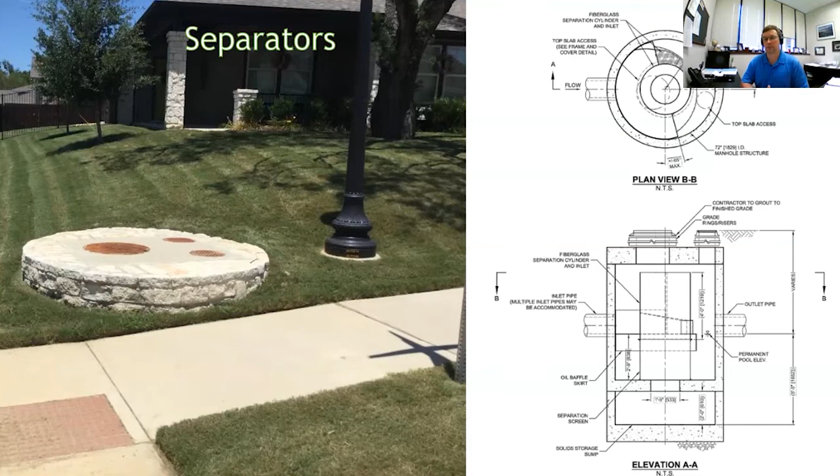This is an example of a separator that was actually installed in a residential area, which we typically don't want or permit. But the cut sheet on the side just shows what's actually in the ground. And what you're seeing on the left picture there is the finished surface product. Usually these go in a parking lot on a commercial setting, so when you see them, they just look like any other manhole in a paved area.

And the one thing that I would note on the post-construction stuff is there is a steep learning curve, both with your in-house staff as well as developer groups and development design staff. That's one of the things that we've been finding. But once everybody kind of works through some of those initial learning struggles, it becomes far easier and far simpler and far more fluid over time.

So the one thing I would mention is build in some flexibility if you're looking at starting a post-construction program, especially in the beginning. You do need to make sure that you apply it equitably. Your municipal facility construction is also complied here, and then industrial and commercial do create more runoff, so they are going to need to treat more. So their devices will need to be larger, and then create a tracking system early.

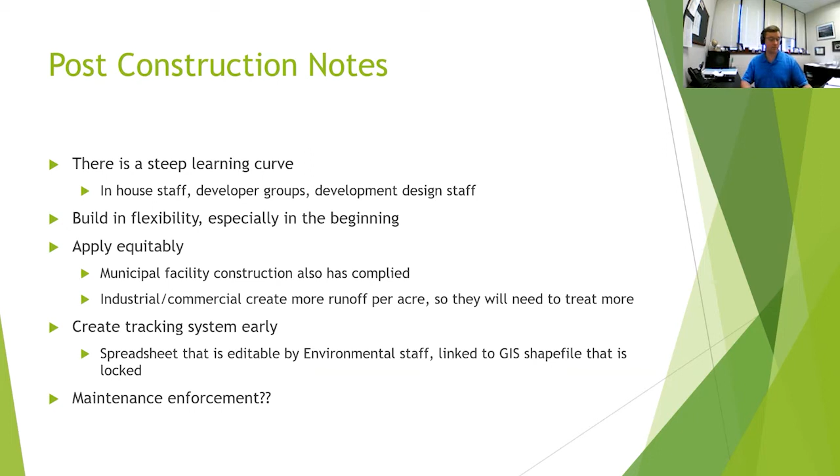We have a spreadsheet that is editable by our environmental staff, so we're able to keep track of things, but it is linked to a GIS shape file, so that when we're out and need to look at something on a map, we're able to do that. And then the one outstanding thing that we don't know about yet is how efficient or effective we're going to be at being able to enforce maintenance over time.

And that is my contact information. If you need anything from me, have any questions, feel free to reach out, particularly related to the post-construction stuff. We're always willing to meet with anybody that's looking to go on ahead and get a program started. Thank you.

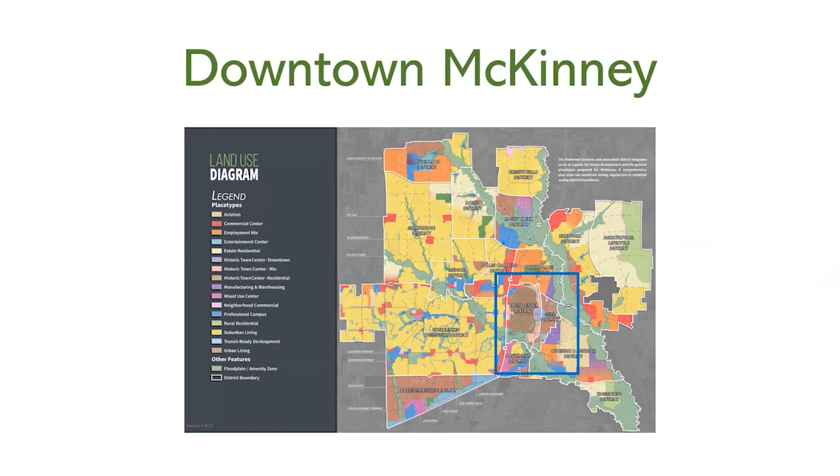Our most concentrated area is that little blue box - it's our downtown area that also consists of our historical downtown, City Hall. We have Highway 5 that flows through it, we have 2 neighborhoods as well as the airport. Our mill district is slowly but surely turning into our arts district, so we have a lot more breweries and multi-use shared spaces slowly being built in that area. So we wanted to concentrate there first.

We actually got really lucky on this one. We had to update our stormwater infrastructure under Highway 5, which required us to do multiple borings, but we wanted to protect the inlets that were already there. So our third-party contractor actually put in some really usable, movable filter curb inlet baskets.

What's nice about these is it's low maintenance - you drill some holes, put the metal gate in, and you can put the basket on it. The whole purpose for this basket was to collect any litter and trash coming specifically off the street, which is where most floatable litter comes from, and to keep it out of the storm system while they were actually building and upgrading that system itself.

What we liked about it was minimal hardware. It's easy for our third-party contractor to put in, and it's also easy for our own crews if, over a long period of time, we had an event with a lot of trash, they can just pop the lid and do it themselves while we still have our monthly maintenance done by a third-party contractor. I don't have the whole cost breakdown, but if you like it, I can reach out to our drainage team. They're the ones that run the contract on that.

What's nice about this is we can move these, which is probably the most important thing as the area of downtown starts to shift and shape and mold itself. Downtown McKinney has a lot of events—holiday events, Oktoberfest, some nonprofit events—and that means an increase in foot traffic. So it behooves us that we can move these knowing when these events are going to happen, because that'll reduce some of the litter coming off the streets as more people participate. That was the system we ultimately decided to go with.

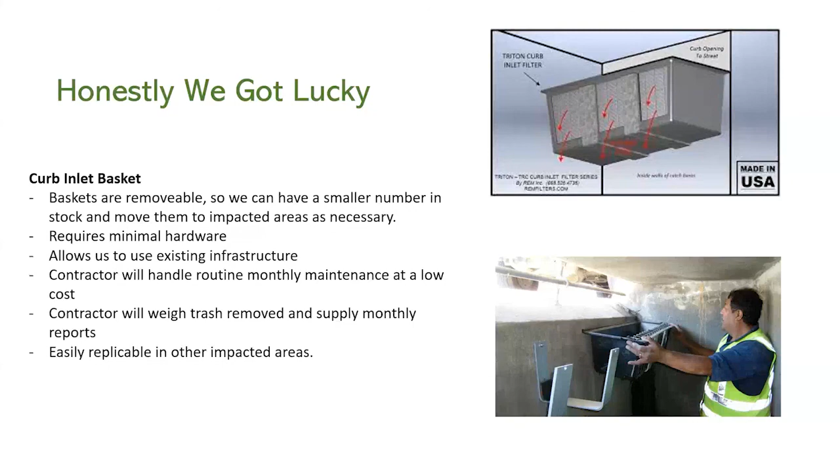That's our physical system. The next thing we have isn't a physical system, but it's a way we're communicating that's helping us get ahead of the problem—our inspector committees. Inspector committees include our police, code, erosion, stormwater, field, and public works departments. They meet at least quarterly, but they have the ability, if there's an immediate problem or something consistent, to call a meeting on the spot, either with all departments or just the ones most relevant.

The biggest thing we're seeing is homeless encampments, which requires a lot of help across the board. Homeless encampments are generally found in out-of-sight areas still close to major roadways, usually on private property. They'll encamp there for months to a year and then leave, but they'll have left a lot of trash. The picture on the right was about 5 tons—when our drainage crew cleaned it up, it was about 5 tons of trash. That's not just floatable; it's strollers, trash cans, and things like that, but a good amount was floatable trash that we were concerned about.

With this inspector committee, what's been very helpful, especially with homeless encampments, is our code enforcement knows how to enforce the private side. Private owners are technically responsible for their property, no matter who dumped or left the litter—they're still ultimately responsible for that site. So we work with code to utilize stormwater ordinances to enforce that. We also work with police officers because sometimes encampments still have individuals there. We have 2 police officers, one who specializes in homeless communities and one who specializes with people suffering from drug addiction. It's been very helpful communicating with them to find other encampments, to mitigate trash and help individuals as a whole.

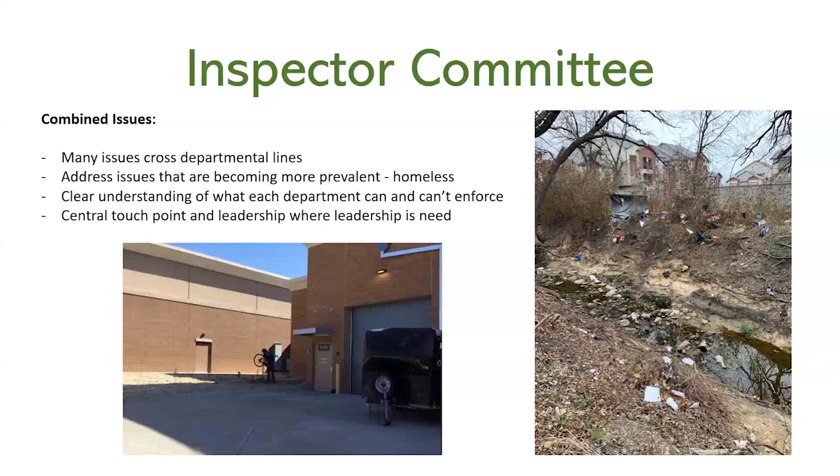What's been helpful with our field crews is they've been able to tell us where trash is naturally piling up in specific areas. Specifically, we have a lot of illicit dumping occurring over by our airport area. The issue is trying to figure out how we can best hedge off some of that trash, and maybe develop a device to help mitigate that in the future. So those are the 2 systems we have over at the city of McKinney. Thank you, guys.